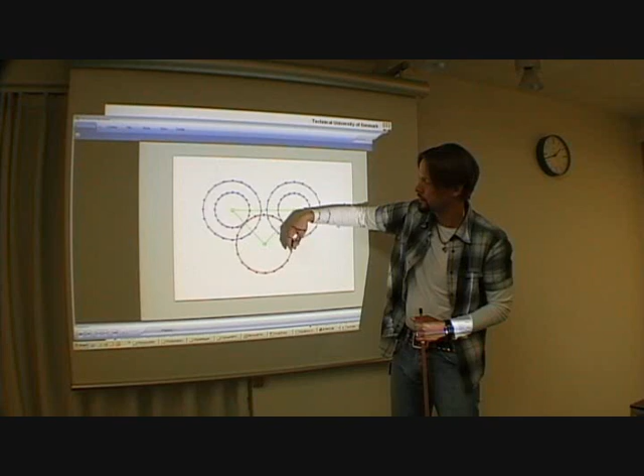So when this is going around, if these are touching at these points, now it's not going that good. But the velocities relative to this frame of this line and this ring is the same. So the velocity of this ring is moving a little bit faster because the radius is different. And well, you can build it of Lego, and then you can play around with it.

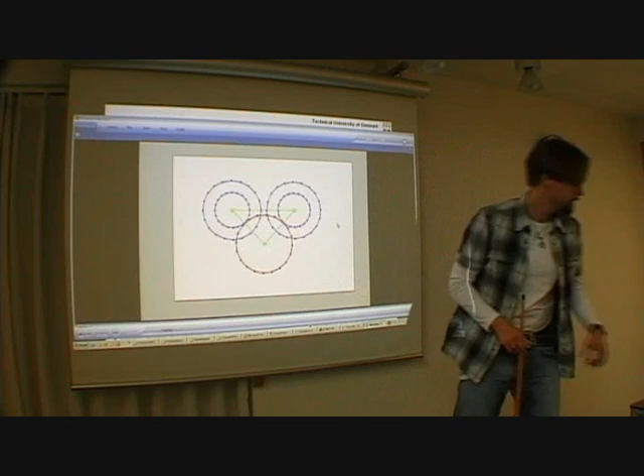But the thing is that I wanted to show you what happens if you stick this thing in between two walls and start moving. Let's say the upper one, and then wait a little bit more, and then you see it's moving. And now I want you to think like, okay, so this could be the ground, and this thing up here moving could be the wind.

And what you see is going on, if the wind is going that way, this thing is going the other way. So that is going, you could say, upwind. And you can build it out of Lego or anything. Really, it's a simple mechanical device.

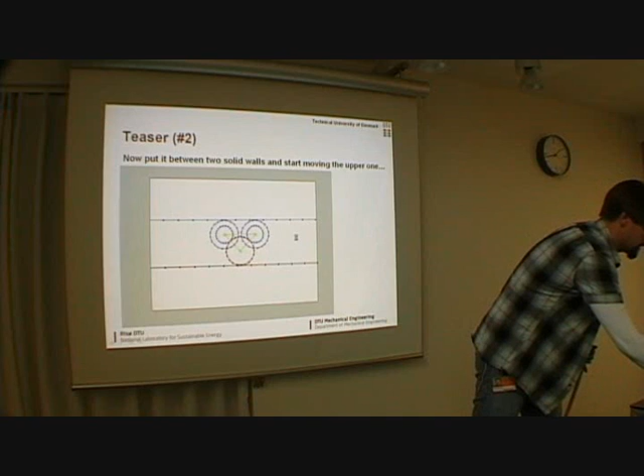So that's a teaser. And what you can do if you have more Lego, or you can carve some out here, so you can actually change the gearing that way. And now you can see that you're not moving the roof as much, but it's going much faster relative to the roof. So the question is here: can you do this between any two media and not just two walls? And I'll try to get into that now.

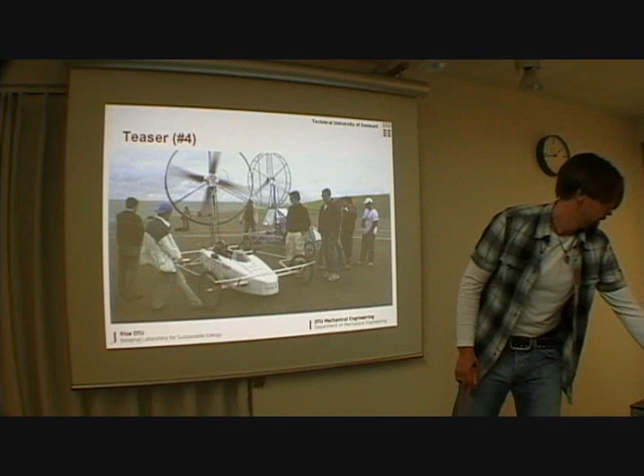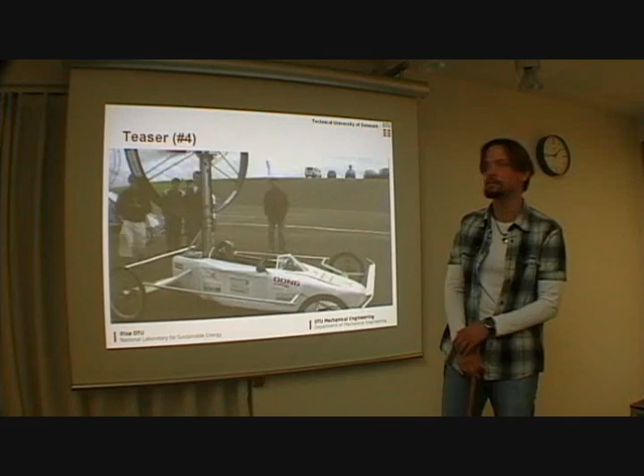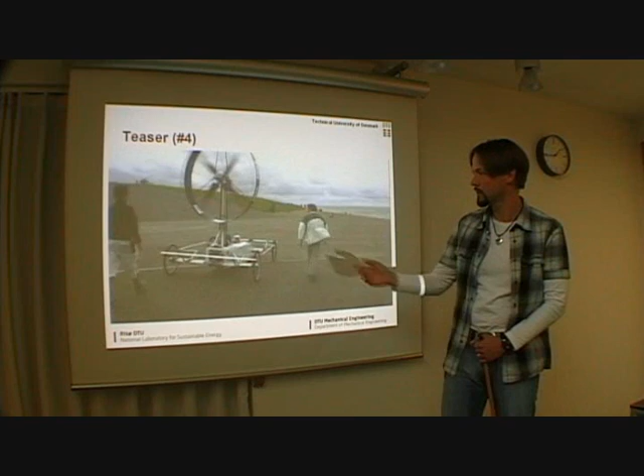Another teaser here is, well, can it be done? I just wanted to show you this is last year's car, and what you can't see is that the wind is actually coming from this direction, so it can be done, and you probably knew that when I said there was a contest. But that was last year's car, and they did go a little bit faster than what we just showed.

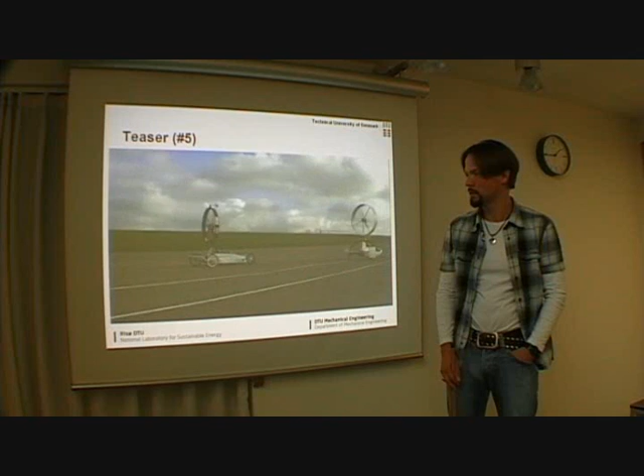So this is how the wind race cars look like, and what I'm going to be doing now is to try and describe to you the theory in a very general manner. So that was in Holland last year, where we got beat by that car, by the Stuttgart team.

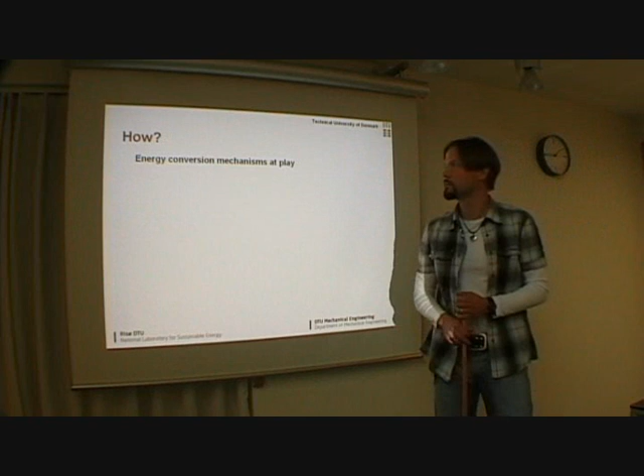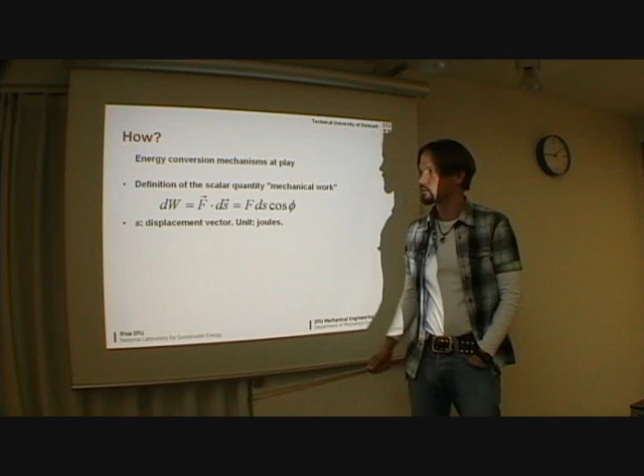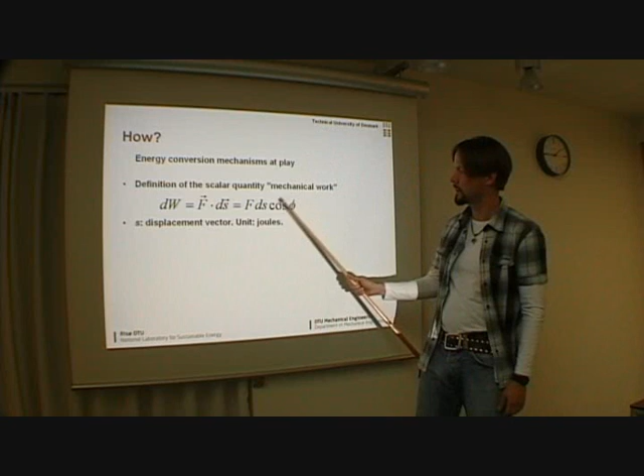So the energy conversion mechanism at play, I think that's the key in a car like that. Let's look at the very basic stuff here. There's mechanical work. This is a little bit of mechanical work. There's a force, and then there's a displacement vector. And the dot product of these two is mechanical work. And if this is the size of the force and the displacement vector, and this is the angle between them, then you can write it like this too.

So if you take the time derivative of something like that, you end up with: the time derivative of work is power, and force times the time derivative of displacement is velocity times the force. And this is the ideal relation. This is without losses. So this is the best you can do if you want to make a power. So then this is the best value you can get.

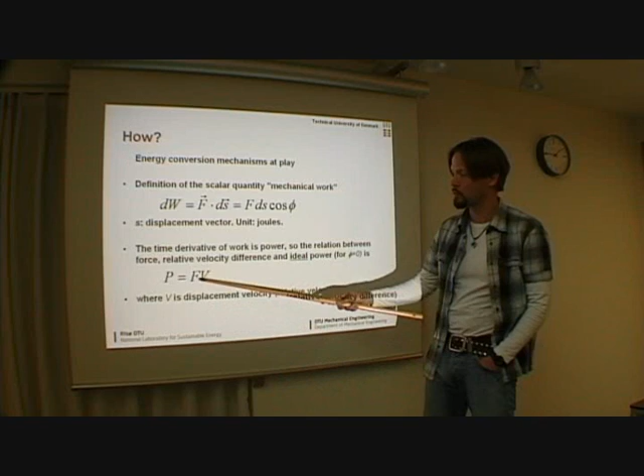Or if you want to make a force from a power, like in the propeller case, so this is the ideal relation. So this is from basic principles. So this is a relation between power, force, and relative velocity between two things.

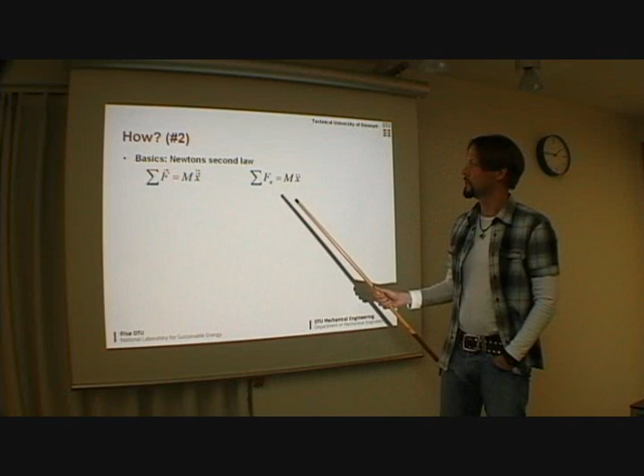So the other thing would be Newton's second law. I'm sure you know that. This is a vector version of it. Force equals mass times acceleration. So I put an x here. Let's say x is the direction you want to go in. So this is what we have.

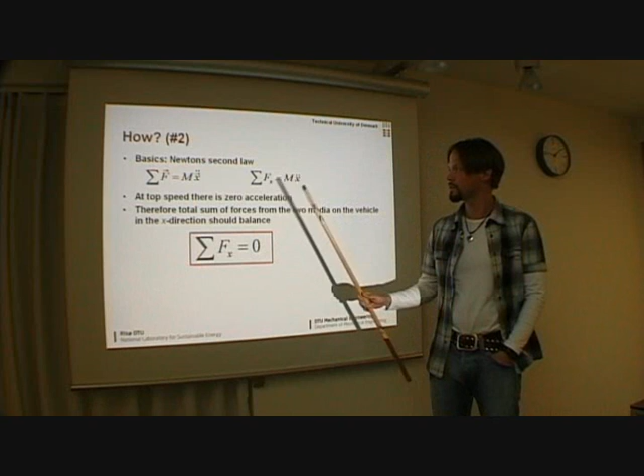So the thing is, when you're at top speed, you don't have any acceleration. So this term here is 0, and therefore the sum of forces should also be 0. So forces should balance at top speed.

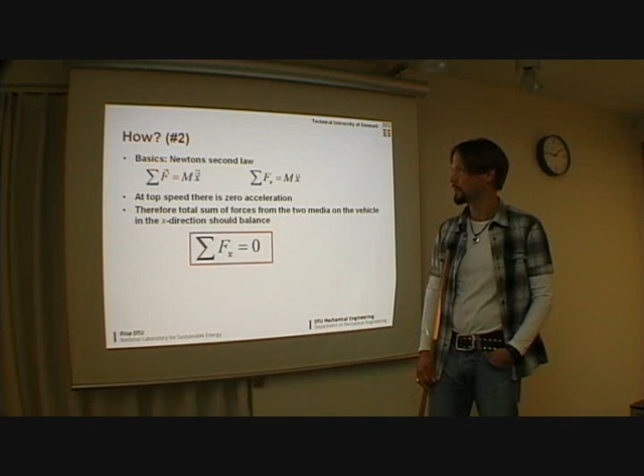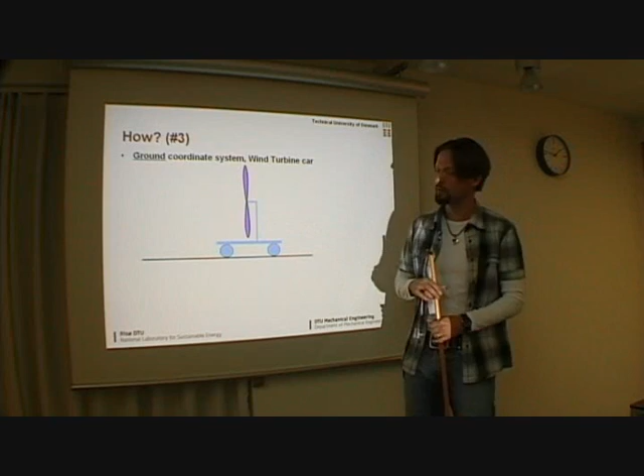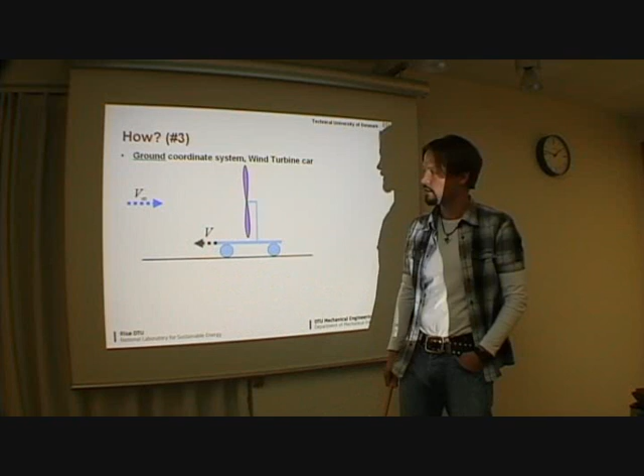Let's look at the thing from the ground. This is now a wind turbine car. You're standing on the ground looking at it, and what you have there is, well, the wind is coming at you at this velocity, and then this is the velocity of the car, and from there there's a wind hitting this rotor. From this there's a thrust. There's a thrust connected to making the power that you want to make on this one.

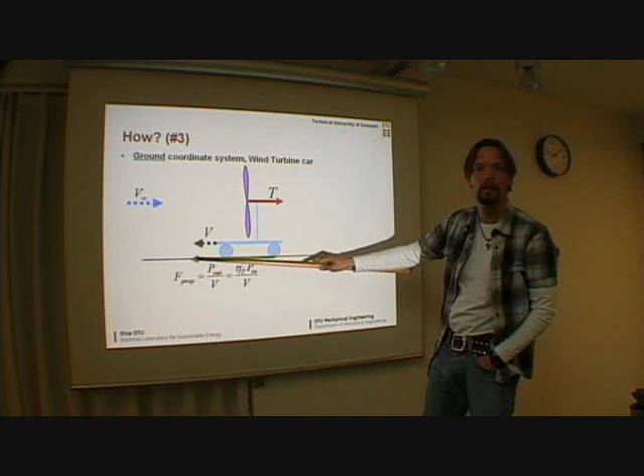So there's a thrust there, and then from the power you make here, you may lose some of it, and then the thing that's left when you get down to the rear wheel is the power you have, divided by the velocity difference between the car and the ground. This is the thing you can make to a propelling force forward. And then there are some losses.

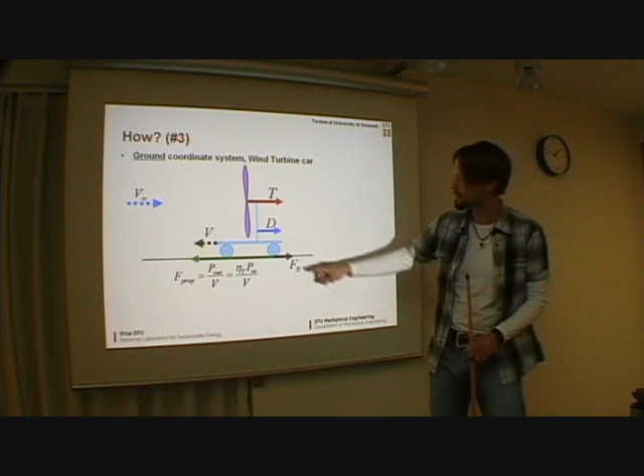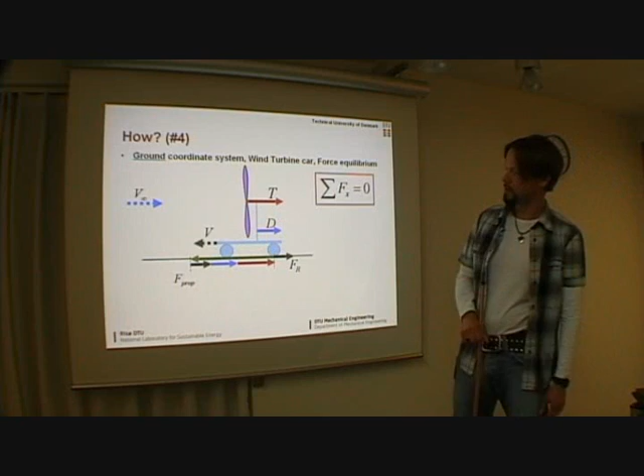Usually there will be a drag on the car. All of this vehicle that is not the rotor, that's the drag here, and then you might have even a rolling resistance down here, which scales with the mass of the car. So if these are the forces, let's see here, they should match up. So all the forces in this direction, that and that, they are here now, and they are just as big as the other one. Then you've got a constant top speed.

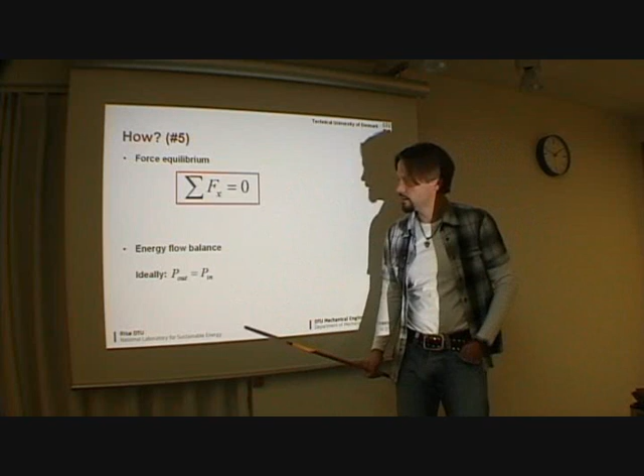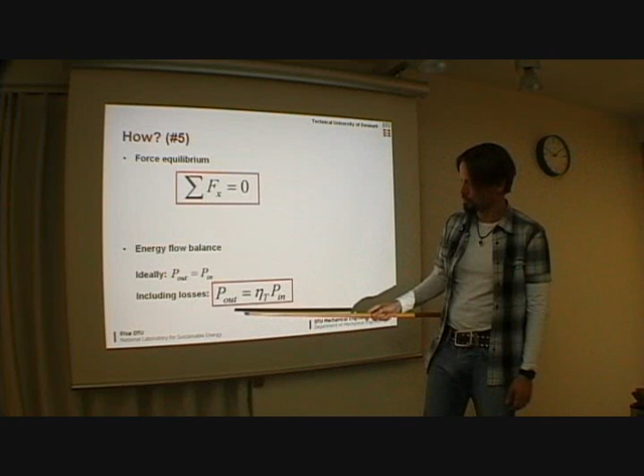So this is one of the basic things we have to do when we put up theory for the car. That was this one. And then energy flow balance. If you make something on the rotor, then you can use all of that to propel the car. But usually you don't have all that, because you'll probably lose some of it. If this is what you make on your rotor, this power, then you lose some of it in the transmission. It gets to heat and noise, which will get to heat in the end.

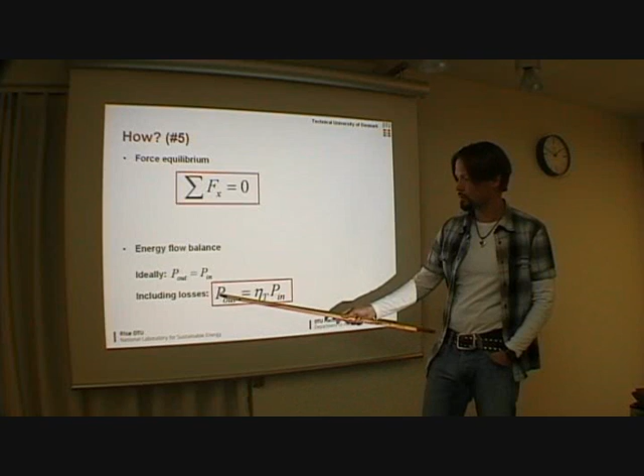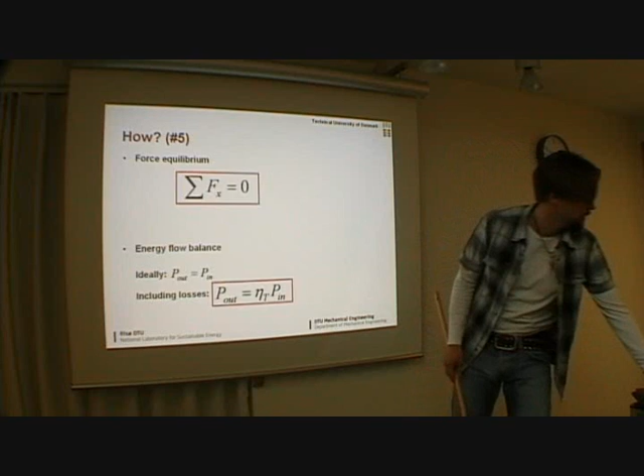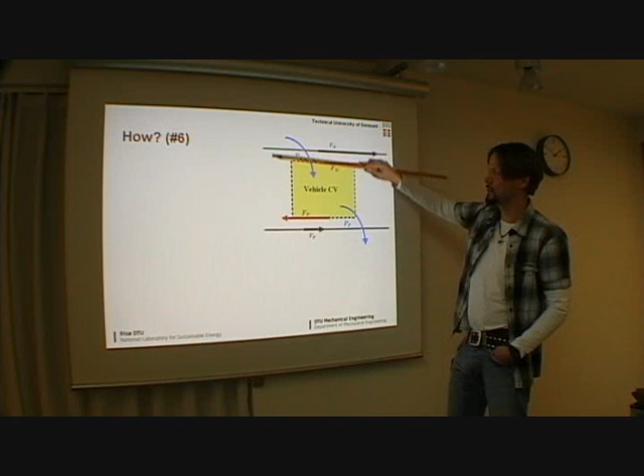If you sit on the vehicle, the ground is moving towards you with a slower speed, and this is where you use your power. And some of the power you generate here gets lost because there's a transmission efficiency less than 1. But the thing is that the force you have to react to the other medium with should balance exactly this one. This is what you have at top speed. So this is really how it works.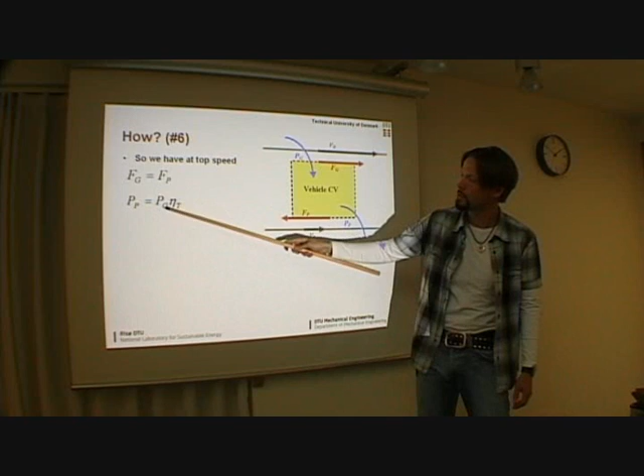Top speed, yeah, this force should be equal to this force, with directions swapped. And then accounting: you produce something at the generation, and then you lose a part of it in the transmission. This is what you have for propulsion down here.